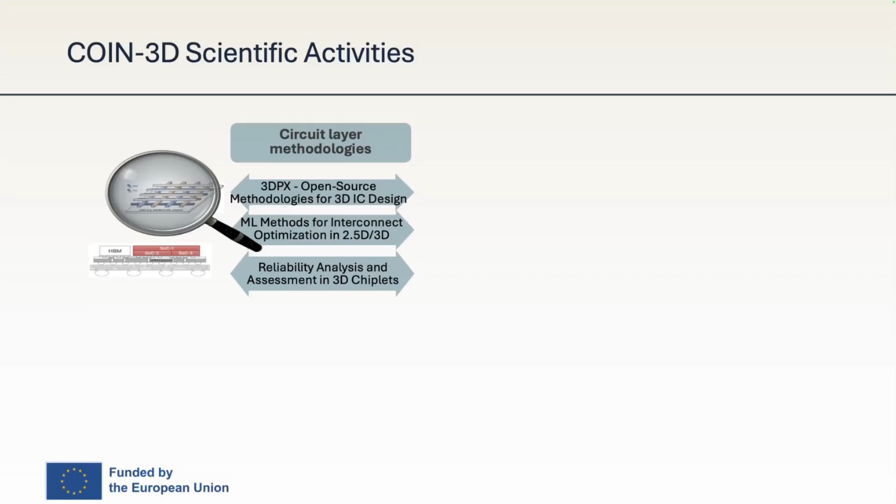We're also working on the system layer, at the more architectural level. We try to create this HotPROTON tool and implement a scheduler for 3D system-level simulation, soft and hard error modeling at the architectural level, and create macro models across the 3D stacking.

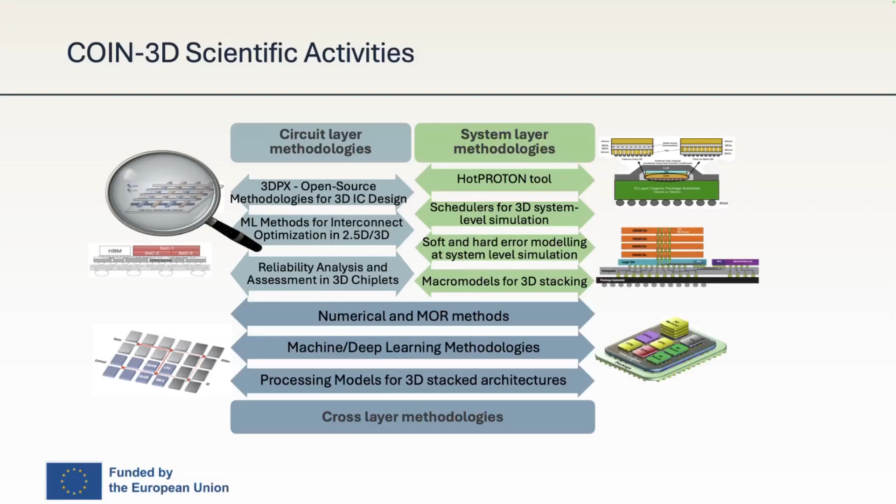All of these technologies are backed with numerical and model order reduction solvers, machine and deep learning methodologies, and several processing models for 3D stacked architectures. Part of what we're doing in research, we also try to promote through different webinars, courses, and summer schools that we create in the COIN-3D context.

So COIN-3D has a great goal of research and knowledge exchange in the 3D VLSI domain between the University of Thessaly and other advanced partners from Europe.

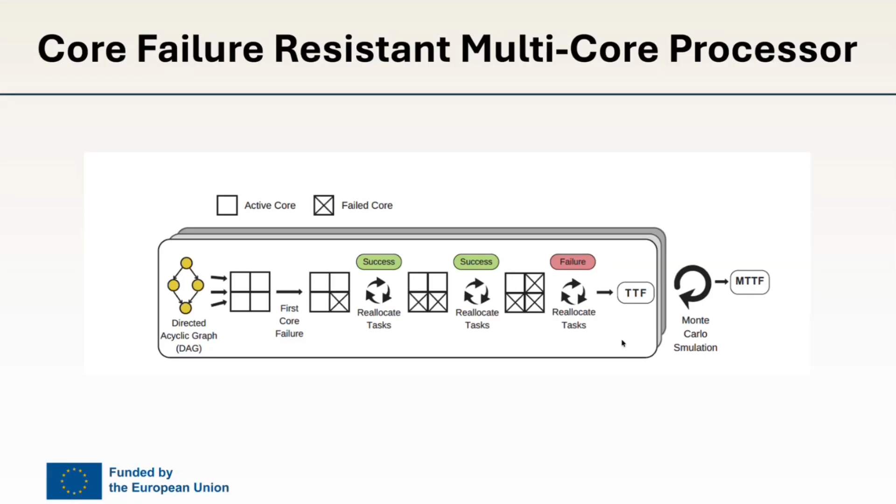So here is a simple example where we have a dual core, core failure resistant multi-core, and there are two cores working, and based on their initial working profile, what kind of workload they have experienced in their history, and what kind of temperature the cores have experienced, they have different levels of reliability. These reliabilities are generally measured in what we call the R value, which is basically a value between 0 and 1 which tells you how likely it is that the core would fail in the next instant.

So if an R value is 100%, then there is very little chance that the core will fail. Whereas if the core has a value of zero, then that means that core is very old and could fail anytime. But let's say if it has an R value of 0.5, then basically it means there's a 50% chance that in the next cycle, the core would fail.

Core failing is a random process, but when we are doing simulations, we do not have real cores that are failing. So we basically assume that if the R value drops below a certain value, then the core is dead, or we run a random number generator, and if the generator says the probability is higher that the core would fail, then we fail the core even if the R value is very high, and the core can similarly survive by the randomness even if the R value is low.

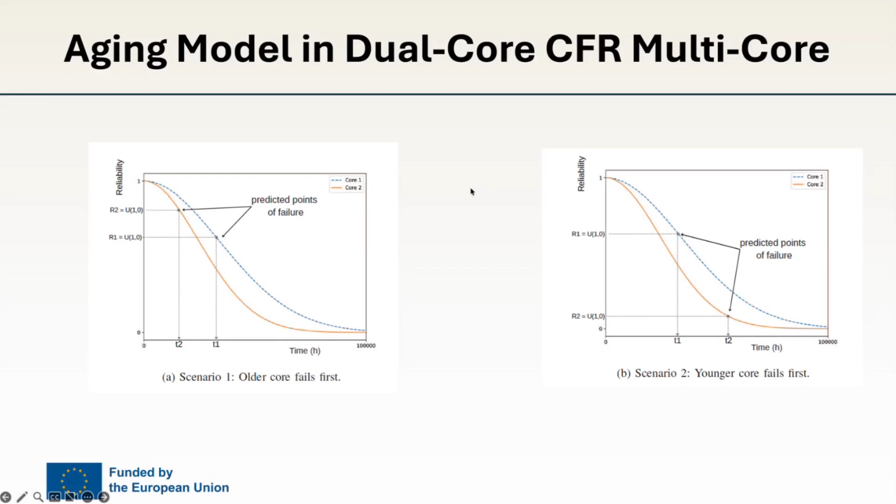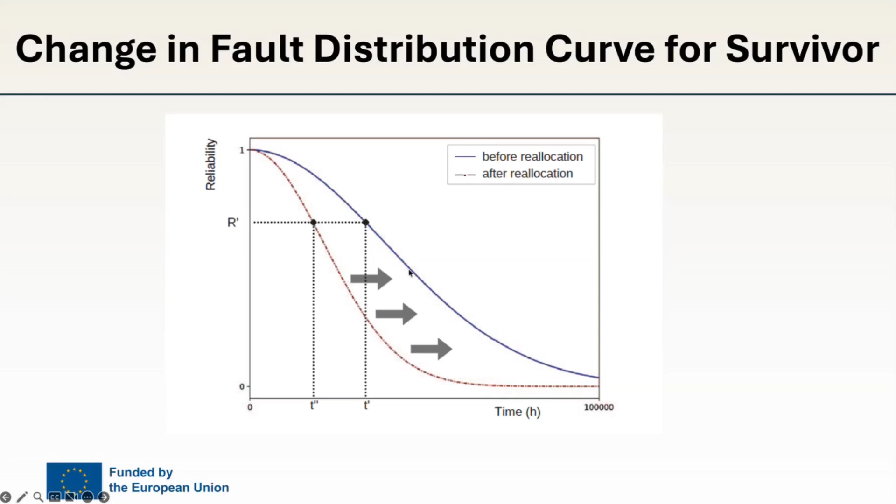So this is how the fault distribution curve for the surviving core changes. So let's say in our case, the old core fails, so the core which is younger needs to take over the load. So the reliability curve shifts for that particular core in the middle of its execution from the old blue one to the new red one.

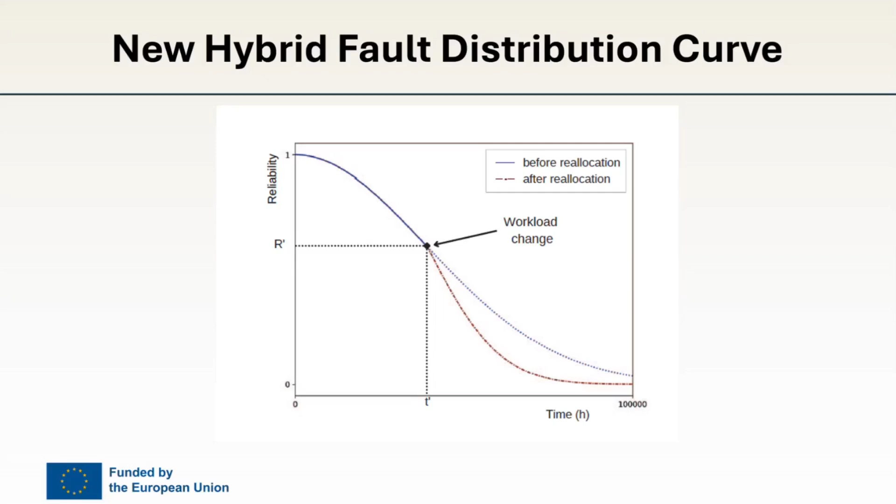So if you want to model the curve for the whole lifetime of this chip, we have to create a hybrid curve where the blue one was the time where there were two cores in the system, and the red one is now the time where there is one core in the system. So this is how the eventual reliability curve for that surviving core would look. And the curve will actually be much steeper because the workload has to be picked up, which means more heat generated on this processor, which will accelerate its aging because it's now taking the full load of the system.

And to do this, we created a framework called Slicer, which is built on the HotSniper tool, which George also talked about with HotProton, so they are related. Basically, we used trace-based simulations in our Slicer framework, where we have a scheduler which reschedules the workload, thermal simulations, and an aging simulator. The user provides the software description, hardware description, SLAs, and scheduling policy, and the framework gives you the mean time to failure.

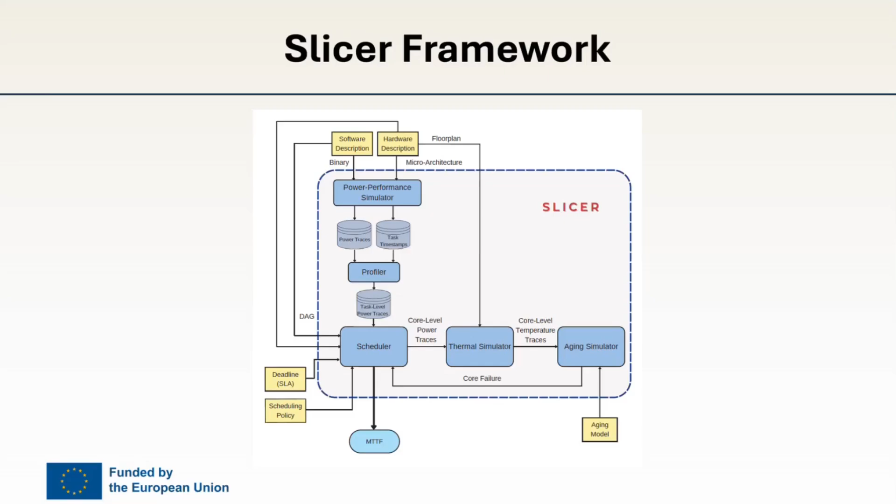We didn't propose our own reliability scheduling algorithm. There are several reliability scheduling algorithms already out there. So we gave the same input in terms of hardware and software description and deadlines, and we saw how good these algorithms are. And our tool was able to show that, for example, the DWDS algorithm is much better at providing higher reliability within the same performance constraint than the other ones in most of the cases for most of the benchmarks.

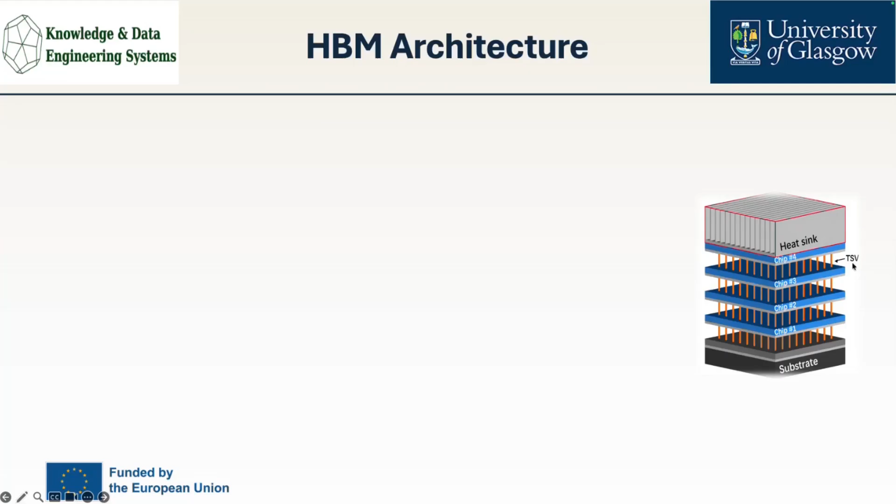So when we talk about the high bandwidth memory architecture, it's not a new kind of memory. It's about how we deploy the DRAMs or memories in the system. So, for example, when we talk about this stack of memories, we can see this as a four-high bandwidth memory from the top to the bottom. At first, from the bottom, we will have a silicon substrate at the bottom.

Then we will have 4 chips or memories. These chips or memories include through silicon via structures in each chip. And these memories will be connected with each other through bonding layers. And at the top, we will have the heat sink or cooling, like air cooling, liquid cooling, or phase change cooling. This is for high bandwidth memory, but we could have 8 layers of memories, or 4, 2, 1, or more.

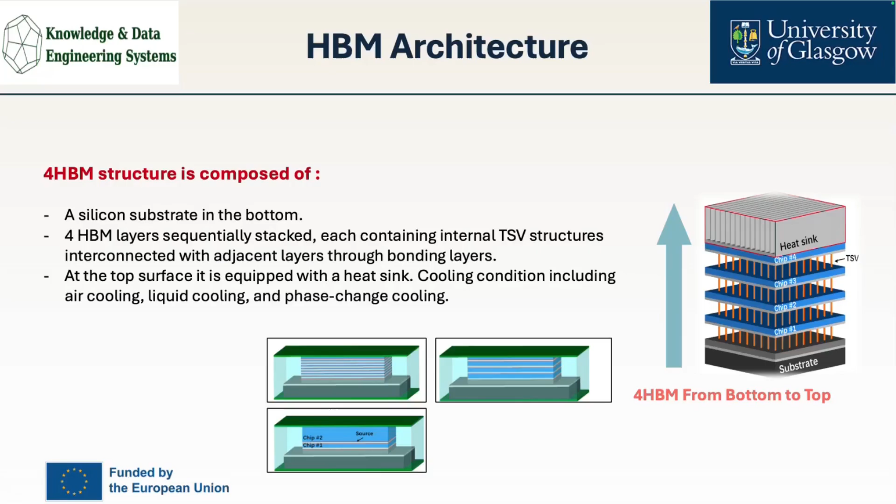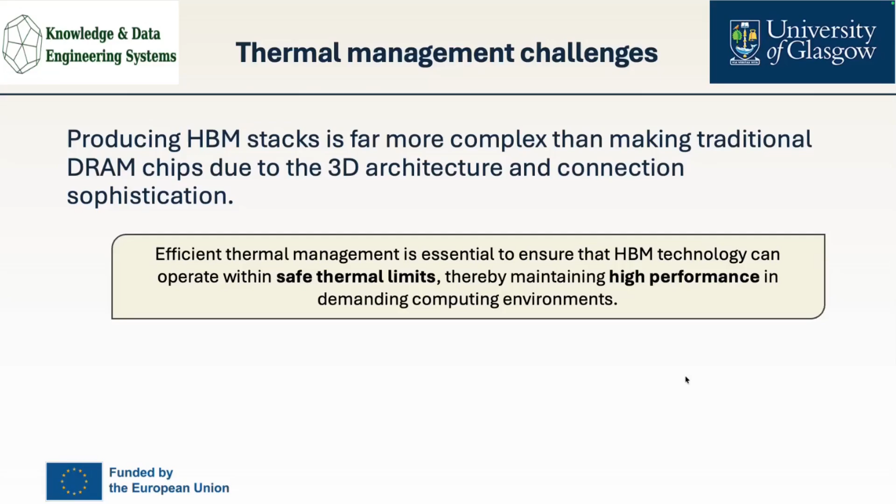So the high bandwidth memory stack is considered more complicated than DRAM chips or traditional methods, because we deal with a 3D architecture, and the connection is sophisticated. So in general, it's important to have thermal management to ensure high bandwidth memory technology can operate within the safe thermal limit and thereby maintain high performance in demanding computing environments.

Also, when we talk about thermal management challenges in high bandwidth memory, the problem is the high power density with stacked chips, especially in the middle layers, that can create a localized hotspot, which can cause thermal stress in the materials, performance degradation, and reduced reliability if it is not controlled.

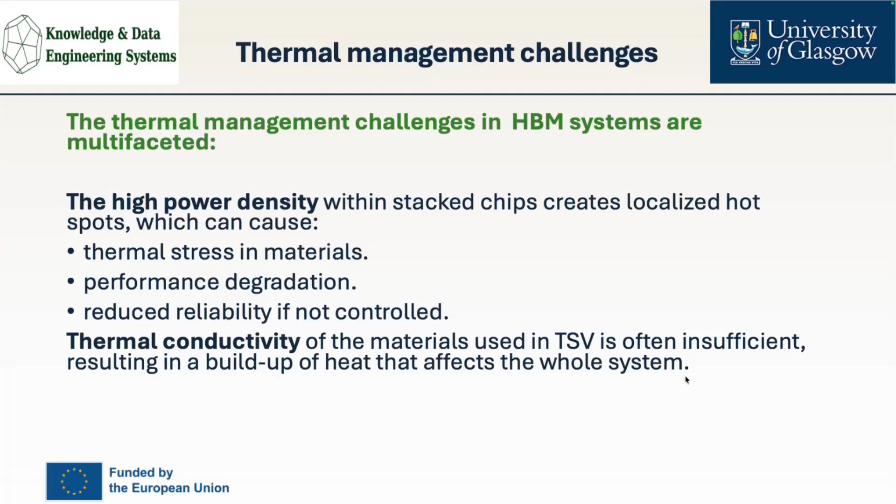We could have another problem, which is the thermal conductivity of the material used in building TSVs. It's often insufficient, resulting in heat build-up that affects the whole system performance. So these challenges require efficient thermal design solutions that require the integration of advanced predictive techniques to ensure optimal thermal performance.

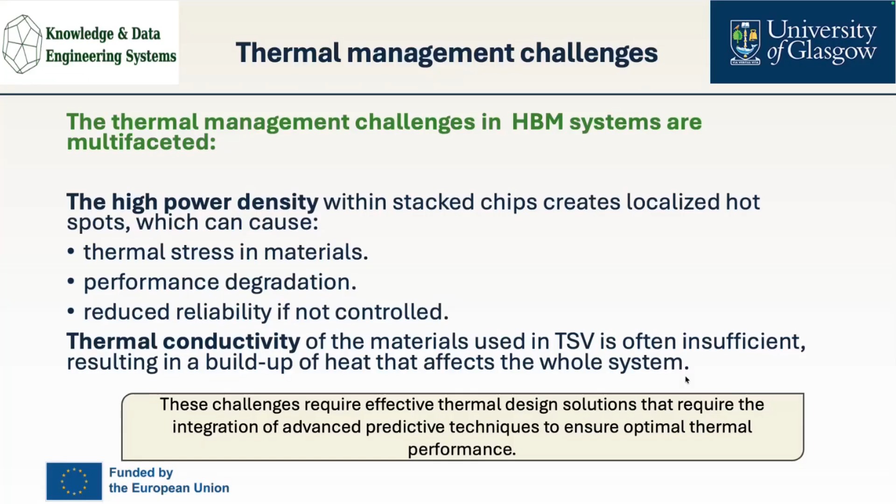Actually, many classic optimization techniques have been used to optimize thermal performance for high density chip stacks. But these methods are not enough. Why they are not enough, we will see now. First, the traditional finite element analysis. This is considered very good and very accurate for simulating heat conduction. But it becomes computationally intensive for large and complex systems like 3D stacks. It's also considered very slow in simulation when we try to explore and optimize different solution spaces.

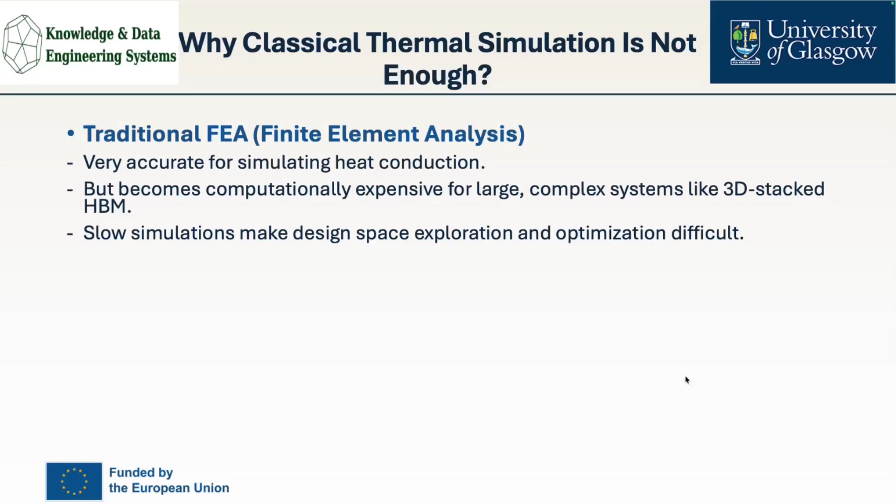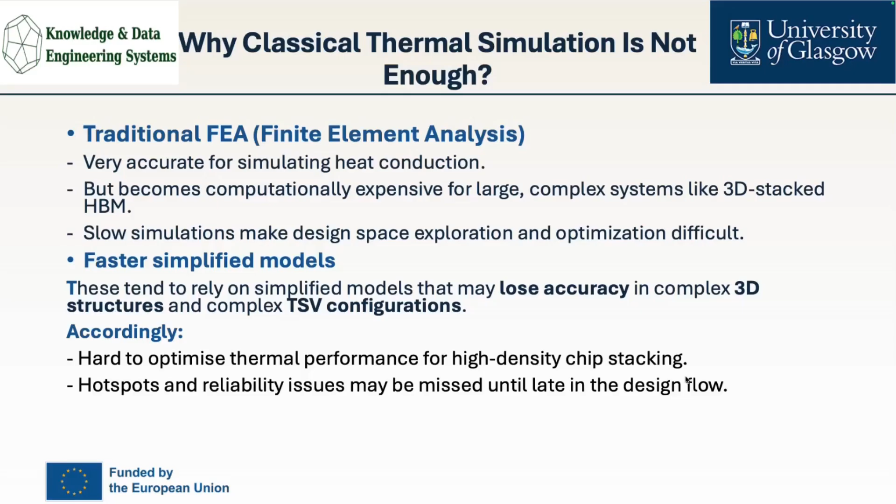There is another method that can be used as well, which is faster simplified models. These models rely on simplification to do some tasks, but they have lower accuracy, especially for 3D structures and TSV configurations. Accordingly, in general, it's hard to optimize thermal performance for high density chip stacks, and hotspot and reliability issues may be missed until later in the design flow.

So we will talk about data-driven and AI solutions. Data-driven and AI solutions are not a new thing. They're applied in different fields, and we will see how we can use them here for optimization goals. Data-driven neural networks can learn from finite element analysis data to compute complex non-linear thermal behavior and hotspot positions with high accuracy. They also provide fast prediction to enable thermal optimization of advanced high bandwidth memory architectures.

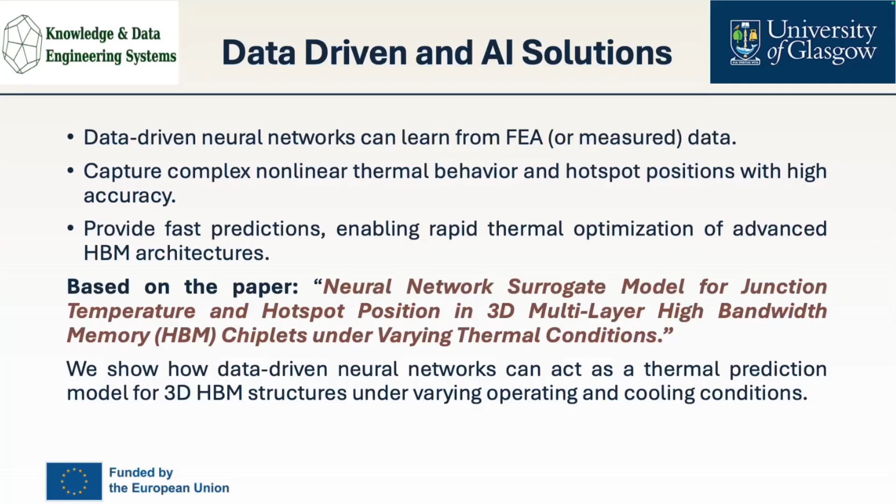Based on this paper called Neural Network Surrogate Model for Junction Temperature and Hotspot Position in 3D Multi-Layer High Bandwidth Memory Chiplet under Varying Thermal Conditions, we will show how a data-driven neural network can act as a thermal prediction model for 3D high bandwidth memory structure under varying operating and cooling conditions.

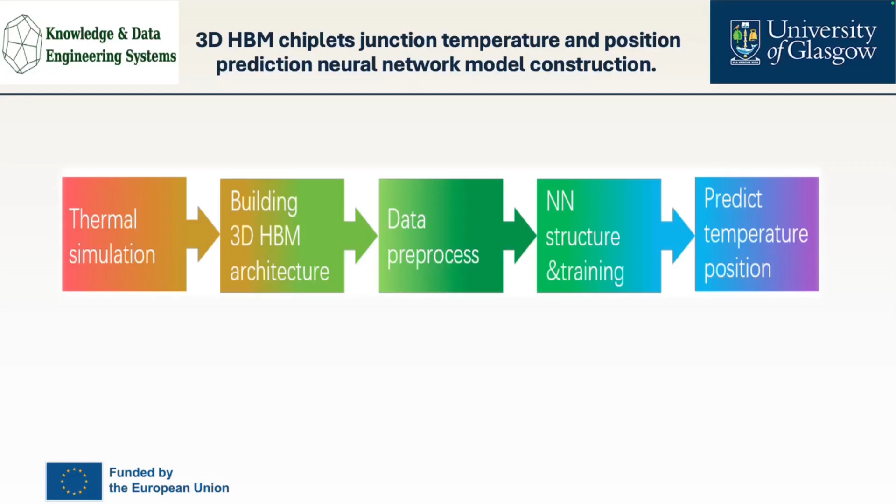First, when we apply AI-driven solutions or deep learning models for solving such kinds of problems, we need to have data. And the best source for the data will be thermal simulations, such as finite element analysis, to build a 3D HBM architecture. Then we will do data preprocessing for the thermal simulation and for the neural network to work on this data. Then we will see the neural network architecture and training, then how the prediction of temperature and position works.

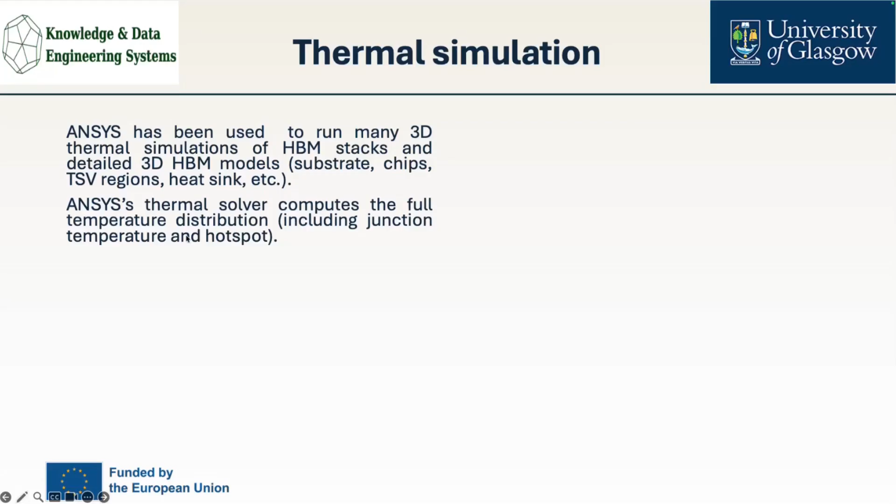First, when we talk about the data source, it will be from the thermal simulation. According to the paper, they used ANSYS to run many 3D thermal simulations of the high bandwidth memory stack, with detailed 3D high bandwidth memory models like substrate, chips, TSV regions, and the heat sinks. And they used a thermal solver that computes the full temperature distribution, including the junction temperature and the hotspots.

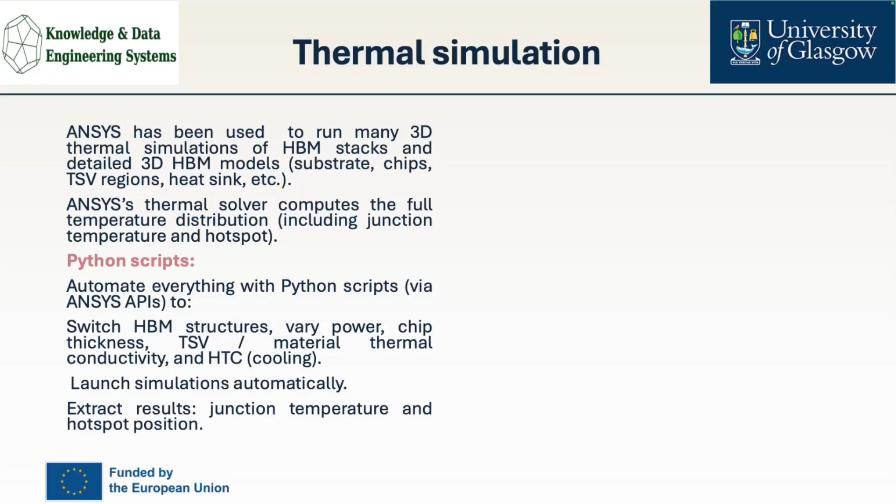As we said, we need to have thousands or tens of thousands of samples. So they used a Python script to automate this process and generate simulation samples from ANSYS. For every iteration, they switch the high bandwidth memory structure and also the power, chip thickness, TSV, material thermal conductivity, and HTC. Then they launch the simulation automatically. After that, they get the extracted results as junction temperature and hotspot positions.

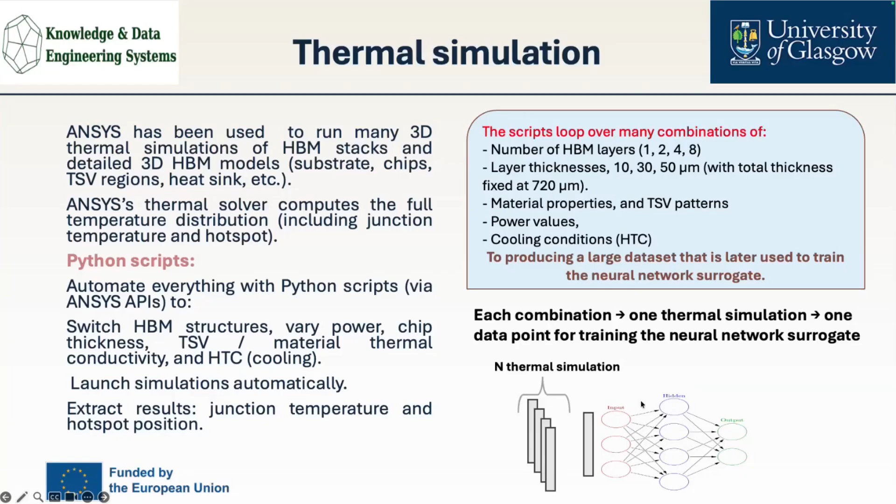So each combination, one thermal simulation, will be considered one data point for the neural network training. For example, here, each simulation goes through a neural network to predict two outputs: junction temperature and hotspot positions. For the data processing, we will have two kinds: data processing for the simulation itself and data processing for the neural network.

For the data processing for the simulation, in general, when we talk about all the possible combinations of high bandwidth memory structure, the number of cases explodes as we add more layers. The number of combinations can reach millions or even billions of simulations, which makes it impossible to simulate all of these cases.

For example, for an 8-layer architecture, we have 4 groups of parameters. First, chip thickness: we have the logic and 7 memory layers, so 8 layers in total. For the TSV or chip thermal conductivity, we also have 1 logic layer and 7 memory layers, so 8. For the power, we have 1 logic layer and 8 memory chips, so 9 layers. For the cooling, we could have top and bottom surfaces, 2 sides.

In total, we have 27 parameters, and each of these parameters has 3 possible values: low, medium, and high. So we have 3 to the power of 27, which is almost 7.6 trillion combinations. And it's not easy to simulate such a number in ANSYS. So we need to reduce this number in an efficient way, while still including all the important combinations.

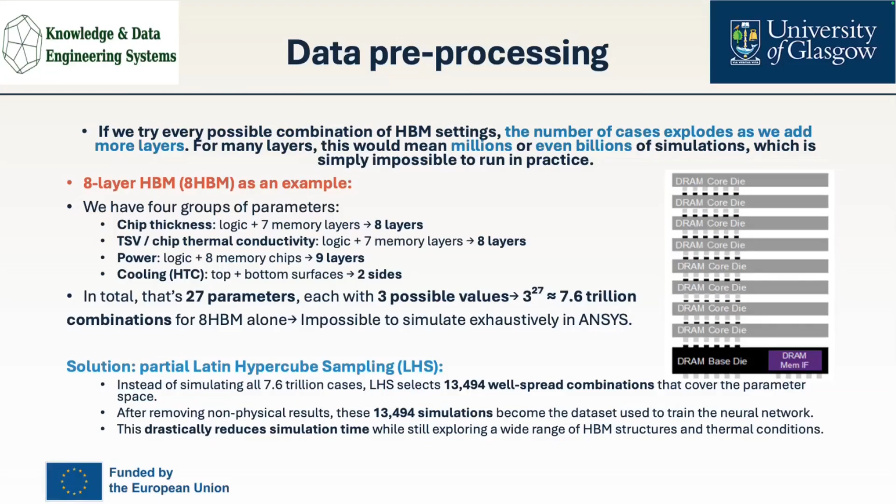After removing the non-physical results, we could have 13,494 simulations. It's a nice number for building a neural network. And also, having like 13,494 simulations reduced the simulation time and still provided us with all the required information.

After the simulation, we expect to use this data for training a neural network model. But actually, we need to do some pre-processing to make the data fit very well for the model. For example, we need to do some normalization for the input data to have all the data in a specific range, between 0 to 1 or between -1 to 1, rather than having a huge difference between the values. So here they use normalization for thickness, power, HTC, temperature, and other factors to have it in the

same range. And also, when we talk about different structures of layers, like 1, 2, 4, 8 layers, that means we will have different numbers of dimensions. If we have 8 layers, we will have a different number of dimensions compared to having 1 or 2 layers. So they did something called a placeholder to fill these places with -1 to have all the dimensions equal for 8 layers, 4 layers, 2, and 1.

Then, as usual in machine learning and deep learning models, we will split the data for training. Most of the data, like 80%, is used for training, and 20% or less for testing the neural network. For the training process itself, we could have two kinds of architecture to train a deep learning model that can predict both junction temperature and the hotspot position.

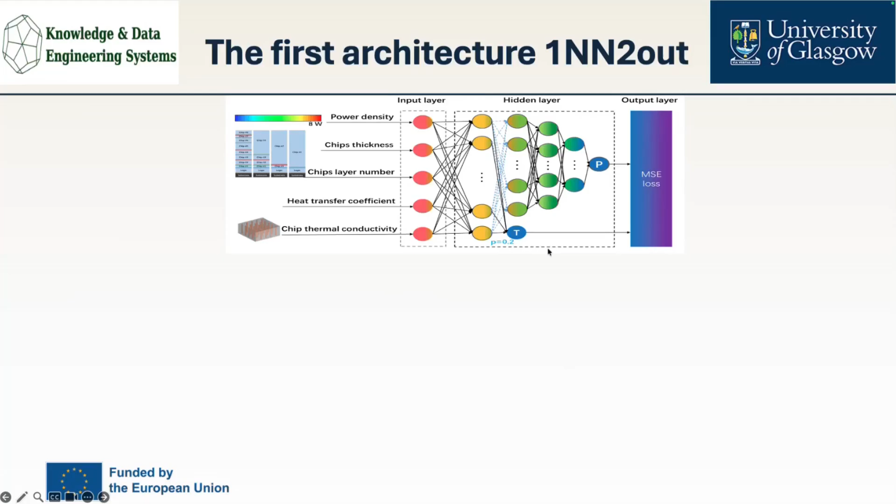As we can see, every combination can be one input for the neural network. And for one neural network and two outputs, as we can see here, the first branch will be the temperature. It finishes its training after the first hidden layer, because we don't need to make it go deeper; it's very simple and can be predicted by one layer. And the second branch, which is the position, needs deeper training, so it will go through 4 layers, and both of them will go through the mean square error.

As we can see here, for the temperature, we will measure the mean square error, and also for the position, we will compute the mean square error. And for the position, we can multiply by a specific factor, like 10 or any number, as a way to reflect the importance of this value.

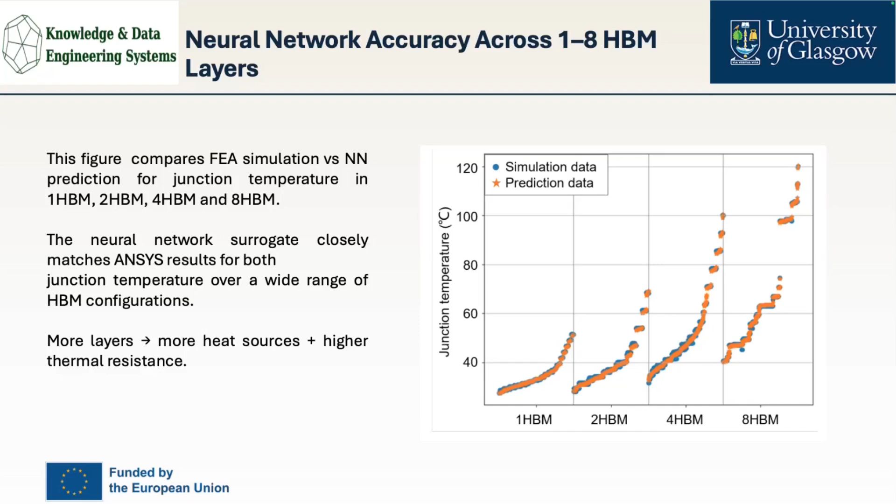And the blue circle is the simulation data, and the star is the prediction. As we can see here, the prediction by the neural network and the simulation are almost the same, and the model can predict the temperature and position with high accuracy, similar to what we can get from the simulation, with a faster implementation.

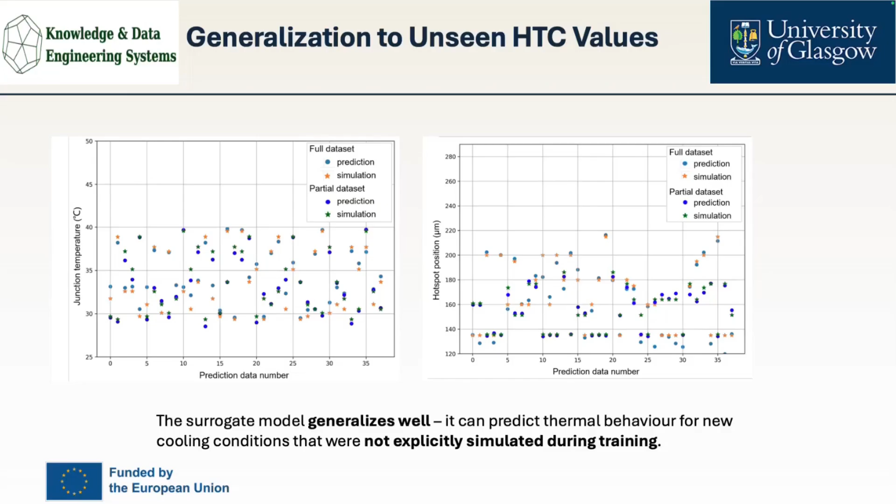So, and also here, they try to measure the generalization of the model according to unseen data. For the blue circle here, it's the prediction, and the green star here, it's the simulation. As we can see, the model prediction is very close to the simulation, even for the unseen data, which means the model can generalize very well for unseen cases.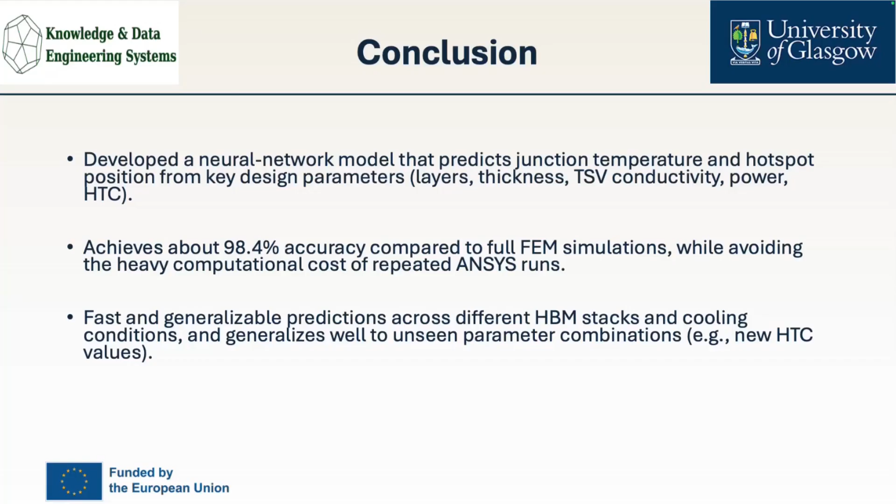In general, we can say we can build a data-driven neural network model to predict the junction temperature and the hotspot position from key design parameters like layer thickness, TSV conductivity, and power HTC. This neural network model can give about 98.4% accuracy compared to finite element analysis, which is considered very high accuracy, with only a few seconds or minutes needed to have this model done. Also, this kind of model can generalize very well for unseen data, which is considered very helpful because it's very fast.

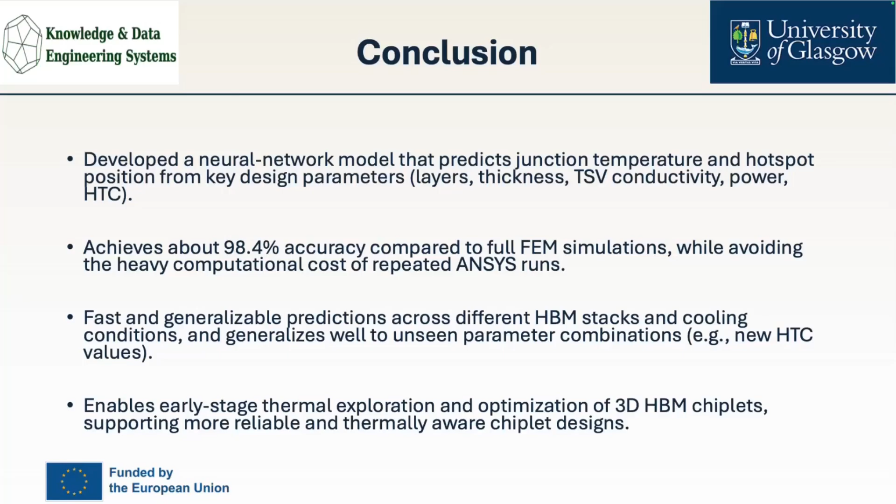So this is the final slide. Thank you very much.

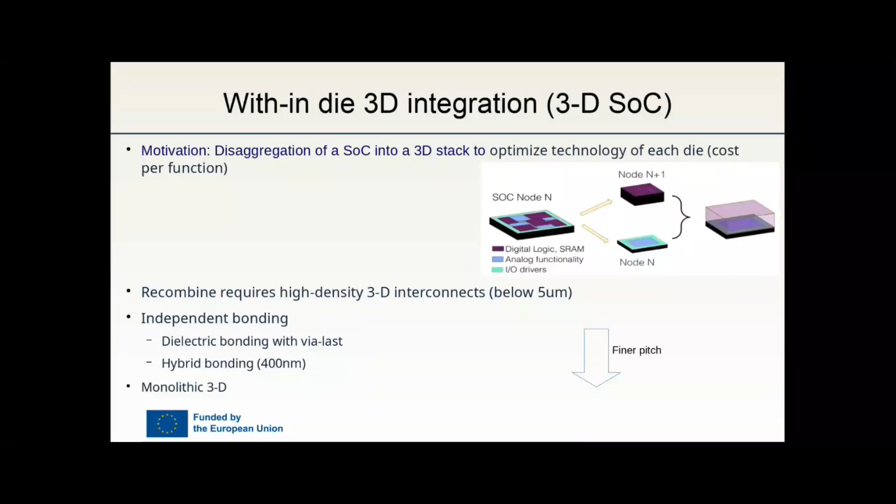Today, the candidate technologies for this very dense 3D interconnect are, on one side, dielectric bonding with via-last or hybrid bonding, with which we can get close to 400 nanometers in terms of interconnect. If we want to move even further, our next candidate is monolithic 3D. This is going to be the target for my presentation today.

If we try to understand more generally how monolithic 3D works, we see that we process one tier, where we have aluminum for the lower interconnect, with maybe three layers of metal and middle interconnect. Once we have implemented this lower technology with its layers, we add another tier on top and continue with the metallization.

The advantage of this kind of technology is that by implementing the tiers sequentially, we can get a very high density in terms of vertical interconnect. Nevertheless, this kind of technology has some fundamental limitations.

The first limitation is that when we produce the transistors in the upper layer, the temperature profile we use negatively affects the chip already produced in the lower part. Because of that, we typically have to use technologies which dramatically limit the temperature during processing of the upper tier. In practice, this means the transistors in the upper tier are slower, of lower quality, than the transistors in the bottom tier. We can model that by assuming the two tiers have different technologies.

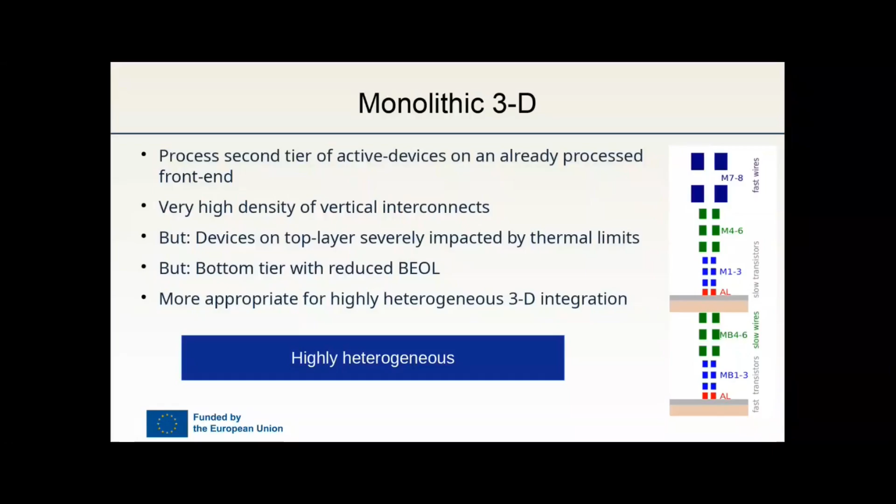So to summarize, the fundamental message is that in monolithic 3D we have a highly heterogeneous scenario: in the bottom tier we have fast transistors with slow and limited wires, while in the upper tier we have slow transistors but a lot of interconnect with very fast wires.

In this slide, we have a short idea about how monolithic 3D is implemented. Fundamentally, we start with one wafer where we implement the transistors, then the metal interconnect.

Once this bottom tier is implemented, we can glue another tier using a technology very similar to the process used for wafer-to-wafer connection with hybrid bonding. After that, we can thin the upper tier, and fundamentally we get the layer where we can implement the transistor.

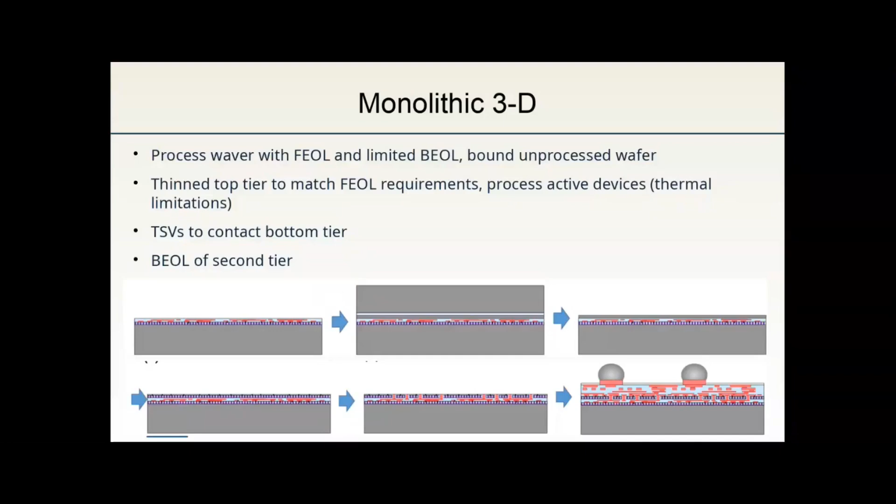In the next step, we start implementing the transistors of the upper tier. Then with the help of MIVs, we can add interconnect between the upper and lower tiers. After that, we continue implementing the metal layers in the upper tiers without restriction. On top of that, if we want, we can add TSVs or C4 connections, connecting this element to the upper one. The key message is that with this technology, we have a very high degree of heterogeneity.

So what is our goal? Fundamentally, our goal is to try to understand and model the electrical characteristics in this kind of monolithic implementation connected by MIVs, to look at our system and see if we can connect elements that, for example, are in the upper tier and then have to be connected to the lower vias.

If we think in terms of transmission of data, in principle you'd say what I need is an encoder for the upper part and then decoding in the lower part. It turns out that in many scenarios, it's possible to encode the information before saving it into the memory, such that the only overhead we have is the decoding.

So our challenge is how to determine the optimal number of repeaters and buffers in our interconnect, how to determine which part of the wiring should go in tier 1 versus tier 2, and finally which is the optimal low-power coding we can use to decrease the energy to the maximum.

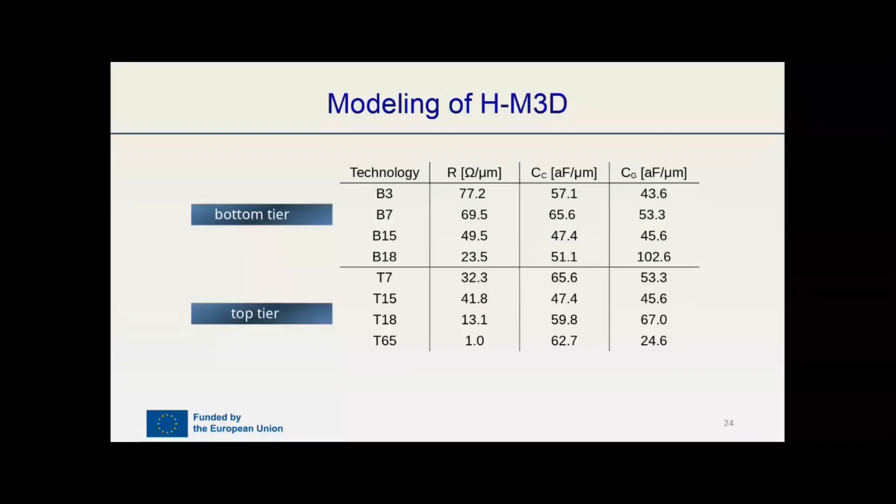The first thing we did was 3D simulations—3D in the sense of simulations in the 3D domain—so that we can characterize the resistance, inductance, and capacitance of all the interconnects in all these technologies.

Once we have this model for the wire, we were just fundamentally looping over all the scenarios in terms of the separation between metal lines, the width of the metal lines, and the strength of the drivers. And for that, we were calculating the energy consumption that we have in the different configurations. In the slide, you can see as an illustration a configuration where we have only one tier, but obviously we did the same simulations when we go from one tier to the other tier.

If you try to simulate just one interconnect in one single wire, then actually the number of simulations is relatively simple. In our case, since we want to understand low power coding, we were actually simulating the delay and the energy consumption that you get when we are sending any pattern of 4 bits through our extracted interconnect architecture. So we were simulating something like 6,000 scenarios per every case.

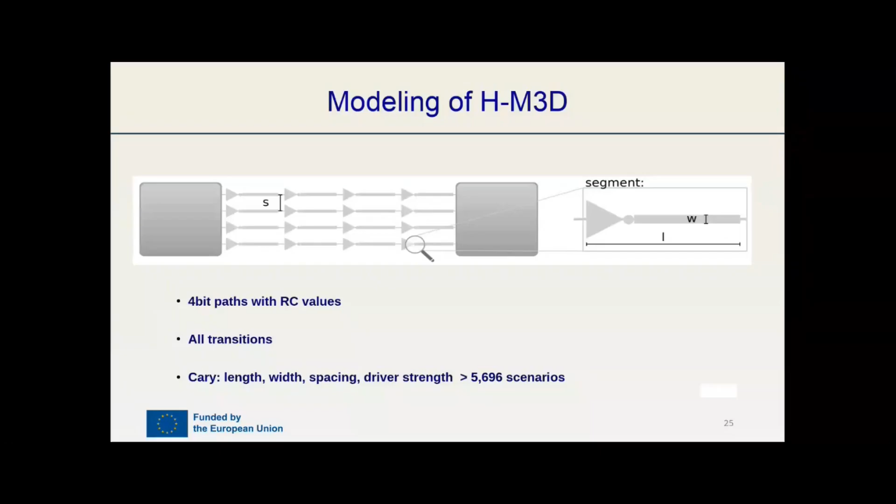We wanted to compare this, let's say, empirical data with the mathematical model. And for that, fundamentally, what we can do is to try to analyze how we can model the energy consumption in an interconnect. This is a classical result where you are in 2D. Fundamentally, if you have two lines, then the switching activity of one of the lines versus the other one produces an energy consumption. The energy consumption is fundamentally the integral of the voltage, which is a constant, times the current, which has a very strange shape depending on the nonlinearity of your CMOS technology.

You can try to reduce the formula even further. You can see that fundamentally the energy consumption that you get is proportional on the one side to the factor Cii, which is related with the ground capacitance that the interconnect in 2D or 3D sees. And then we see Cij, which is the coupling capacitance that the interconnect is seeing between two neighbors.

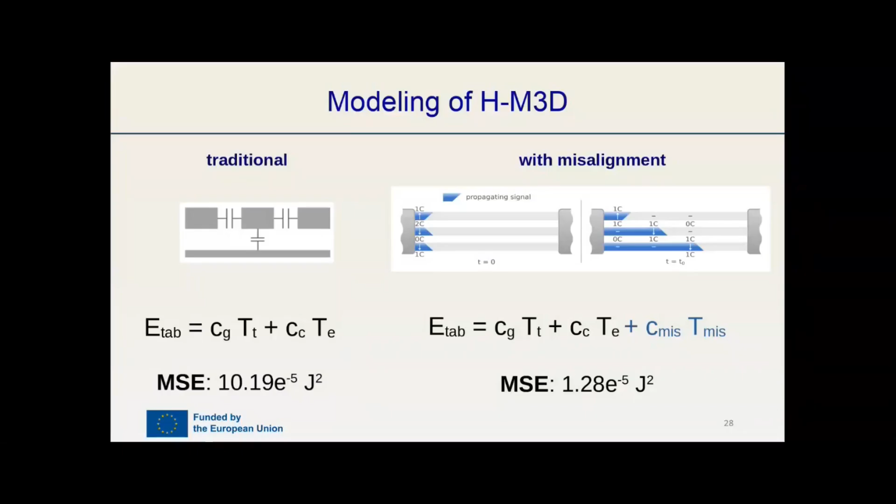If we want to improve the accuracy, even in the case of misalignment, what we can do is to add one term here, the misaligned capacitance multiplied by T misaligned, that fundamentally models the variation of the energy when the patterns that propagate through our bus move over time. Just adding this additional factor decreases the error, increases the accuracy, by something like a factor of 10.

But the other thing, which is even more interesting, is that there is a very strong correlation between the value of the misalignment capacitance and the CC and CG, so that it is almost possible to determine the optimal misalignment capacitance just as a function of CC and CG. This implies that probably it could be possible to produce a much more accurate model for energy consumption if we are using a principal component analysis technique.

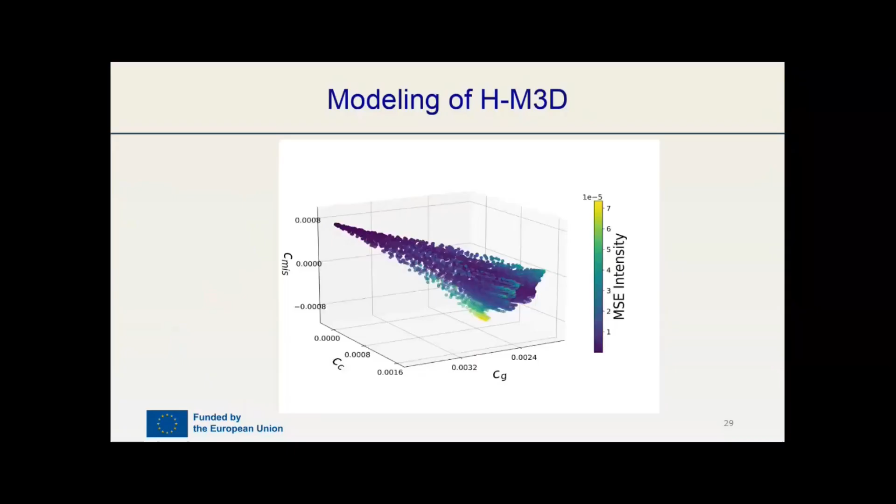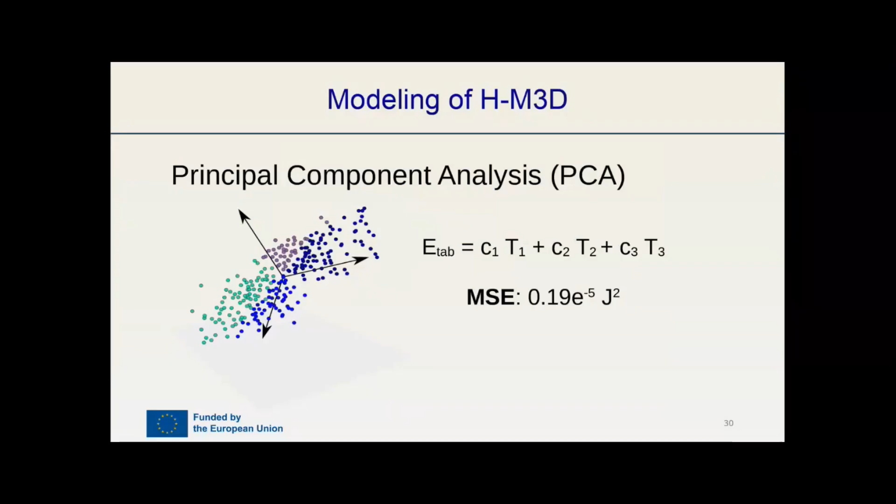Moreover, the advantage of this more precise, let's say, formulation is that it allows us to understand the energy as a function of the factors T1, T2, T3. And these are exactly the factors that we can reduce through coding.

Once we had understood our technology, our next step was to try to understand the data. As an example, just because of the relevance today, what we did was to take the data regarding the activations and the weights that we have in different modern machine learning applications. For example, we were using a vision transformer, a Swin vision transformer, and an OPT machine learning approach.

We were taking the data regarding the weights and the data regarding the activations. So fundamentally, this will be the data that we saw in the previous presentation, that we have to move from the memory to the hardware accelerator. We were analyzing this data.

We were just calculating the typical standard deviation, the entropy that you have in the MSBs. And we realized that actually there was a lot of redundancy in the data. So you see that the entropy in the MSB is actually much smaller than the number 4. This means that there is a large potential for improvements in terms of low power coding.